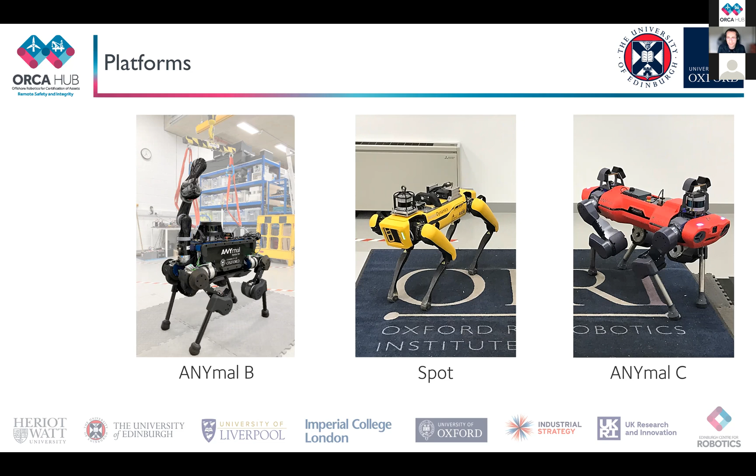So the challenge builds on our strengths, of course, from our previous ORCA Hub work. And the main focus now is further developing our inspection and manipulation capabilities.

I hope many of you have already seen some of the deployments and demonstrations that we've done over the past 3 years as part of the ORCA industry demos. But now what we're focusing on is these 4 main tasks for the challenge.

So one would be, of course, navigation and manipulation for real-world facilities, working more towards inspection and intervention capabilities, automated monitoring of the state of a system, doing all that with online perception feedback, which would be important for the leftmost task that we'll be working on with the ANYmal robots with the manipulators.

And then the second task would be on developing scanning capabilities to deal with complex curved surfaces and how to best integrate that with loco-manipulation capabilities with our platforms.

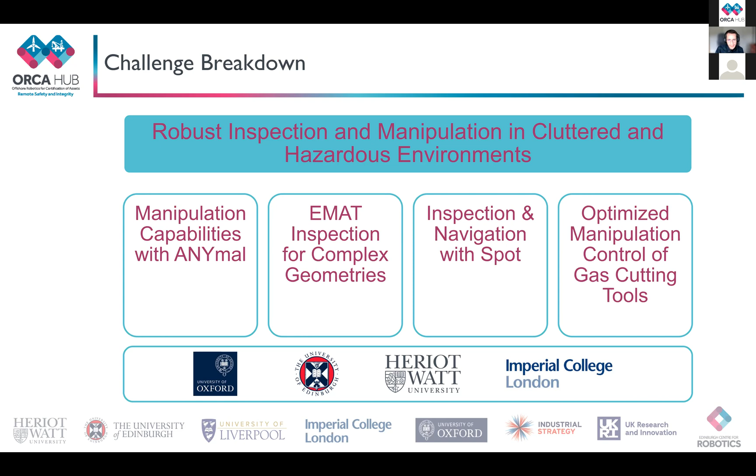And all these tasks are mainly supported by the ORCA partners listed there: the University of Oxford, Heriot-Watt, Imperial, and of course the University of Edinburgh. All of us already have a strong track record along the lines of the tasks we're proposing here, and we hope we can develop and extend this quite a bit over the course of the next year. So now I'm going to go in a bit more detail on each of the strands of the challenge.

I realize that I have way too many slides here, so I'm going to be quite brief on each slide. But I think it's quite important to have this information here so you can go back to it, or you can ask more questions and go into more detail into the particular aspects of the project that you're more interested in.

So first of all, on navigation and manipulation in cluttered environments, we've already been working on facility level multi-floor path planning. And now our focus would be on how we can add temporal semantic information and how to integrate that into a digital twin of a facility.

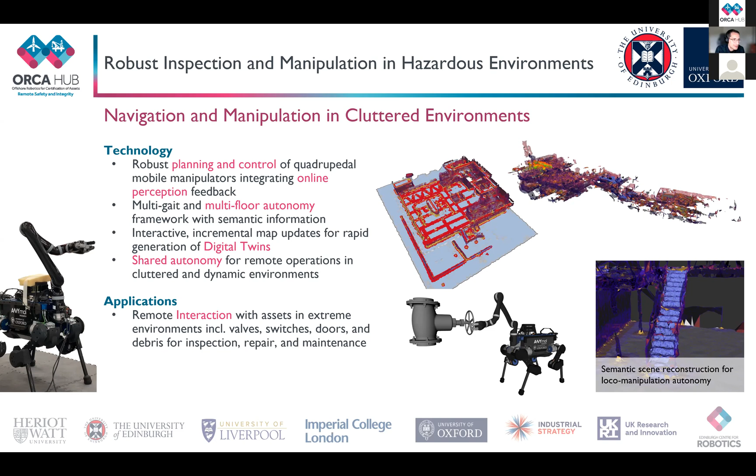And these are some examples of how the work will be shaped. So this is the approach that we have developed over the past 3 years on working with the ORCA Hub. This is a geometric-based approach that can either use point clouds that we collect on site with the robots, or we can use a model of the facility that we had beforehand.

And with this we've developed a geometric approach that builds a digital twin of the facility, and this can then be used, on one hand, as a way of doing really fast motion planning or route planning on multiple floors, and on the other hand as a way of storing other aspects of the facility as temporal information, semantic information, occupancy information, and any other type of detail that we want to be able to log.

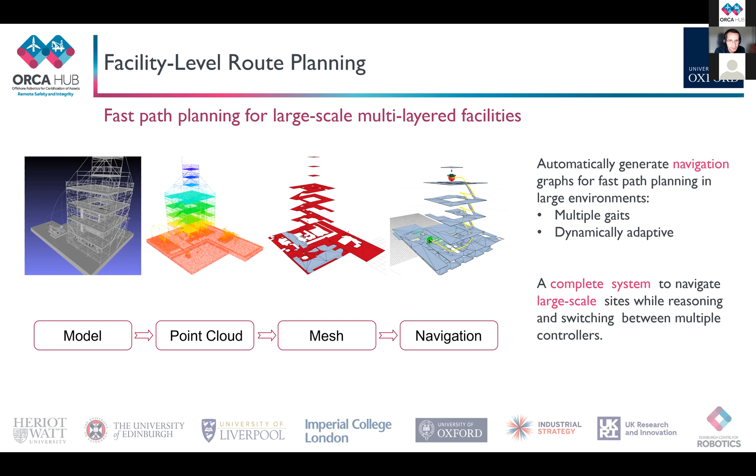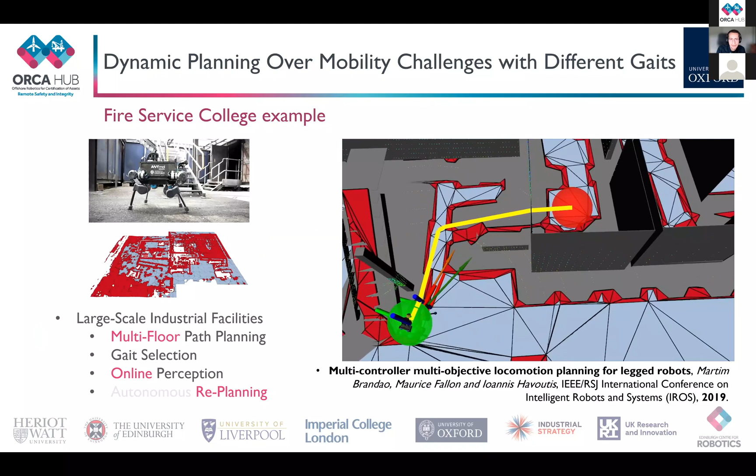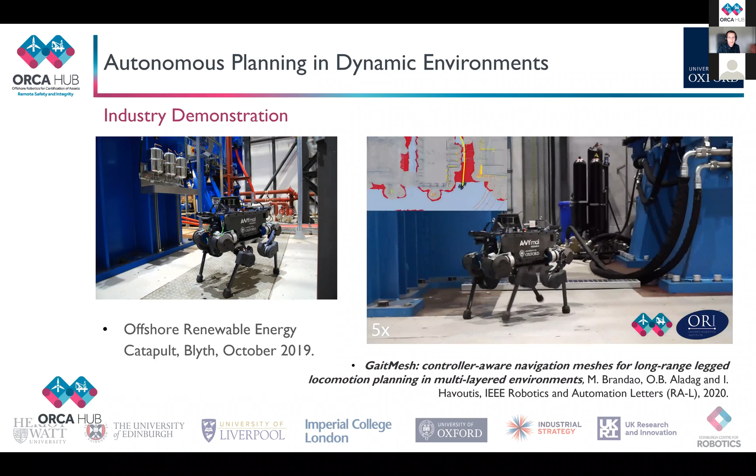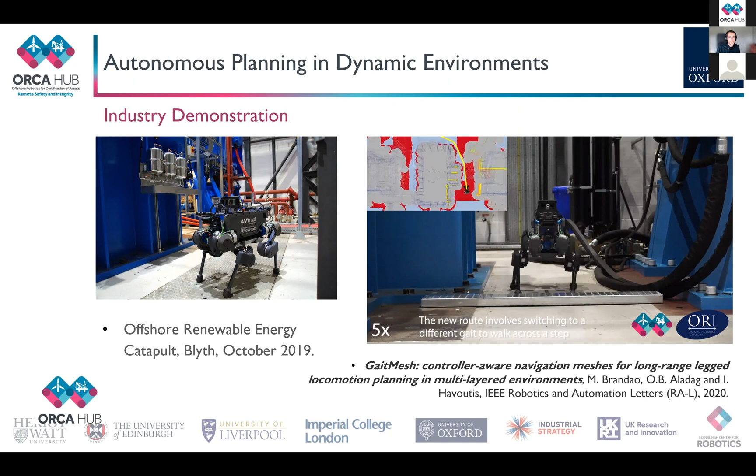So this is how this looks from the perspective of the robot, and this is what we use to do the path planning. But what I think is more interesting is that this is what enables us to react online to a changing environment. For example, having a robot that does inspection tasks completely autonomously, and then having different routes change, for example having obstacles or people in the way of the robot, and having the robot autonomously decide which path to choose or how to avoid moving obstacles and how to deal with humans and so on.

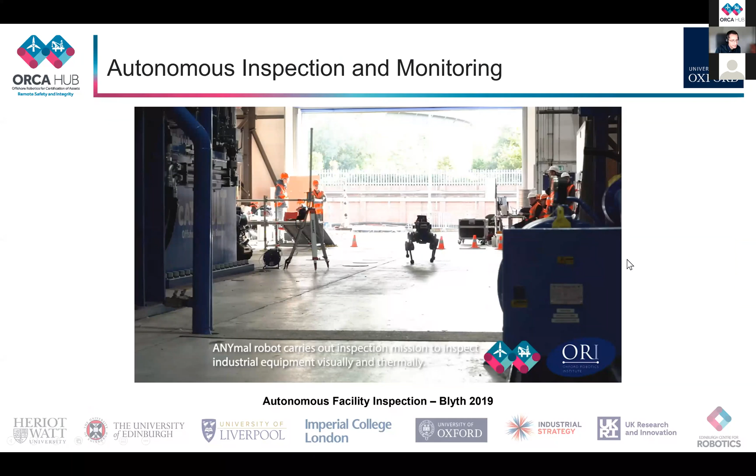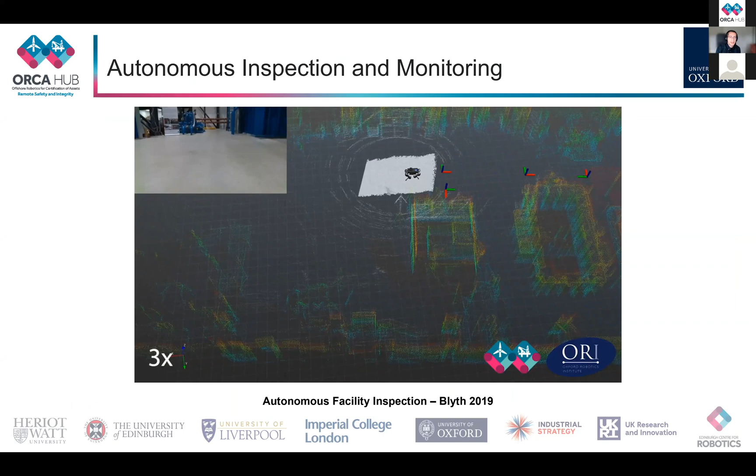And of course, this is only one part of the bigger picture. That is the capabilities that we've been developing for completely autonomous inspection of large industrial facilities. Here is one clip that some of you might have already seen. This is the framework that we developed for building a map and then having a robot perform this sort of

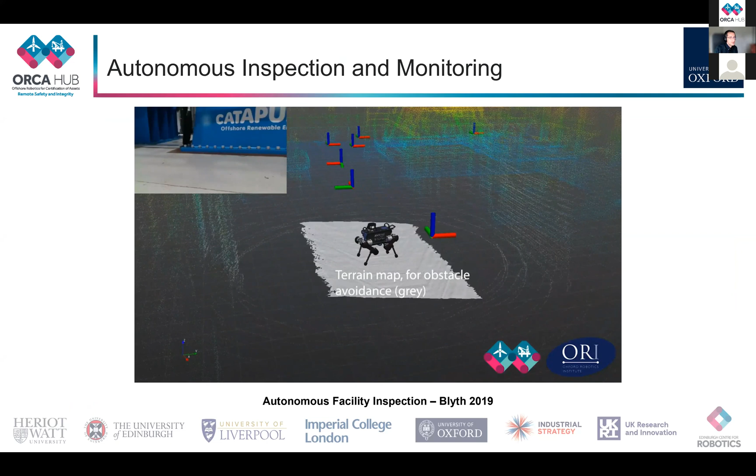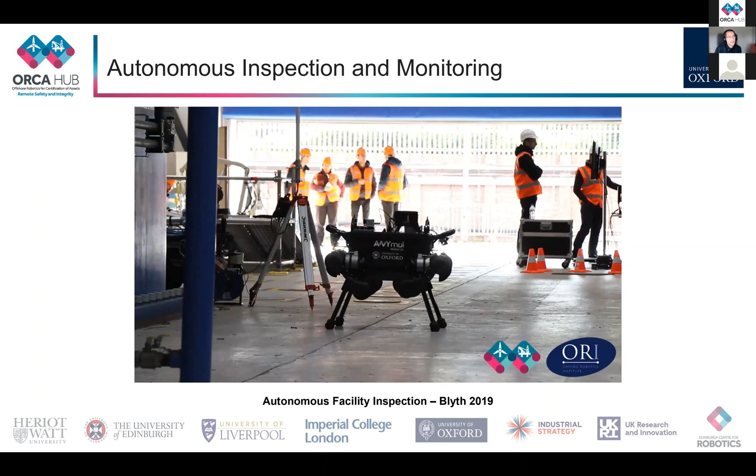inspection tasks in a completely automated fashion. So the robot here is following a route that is its regular inspection path, and then it's pointing its sensors to the points of interest that we

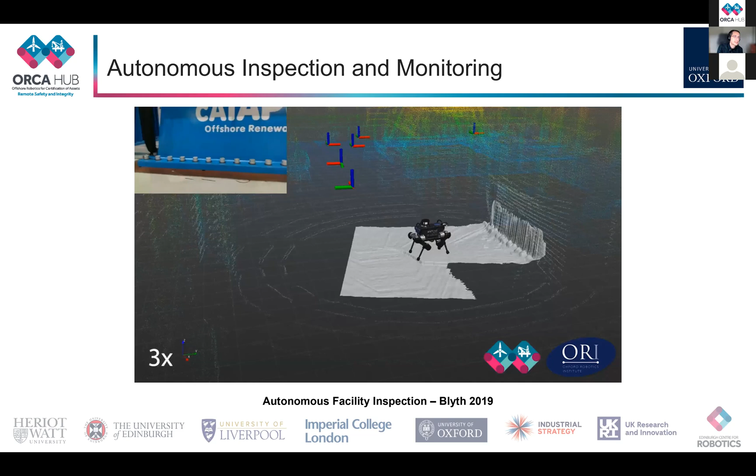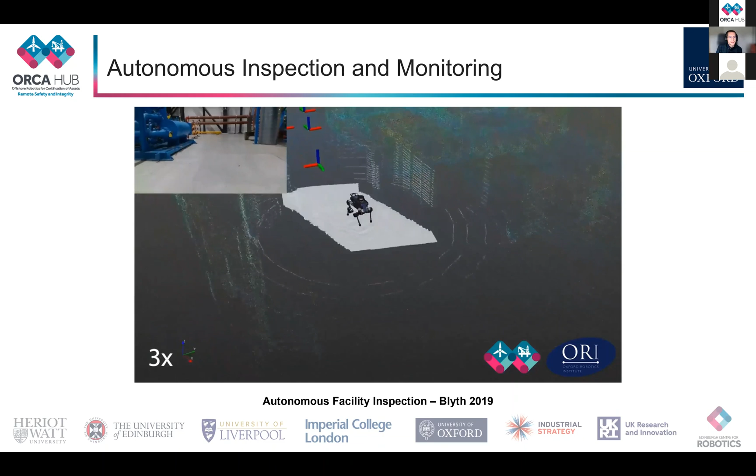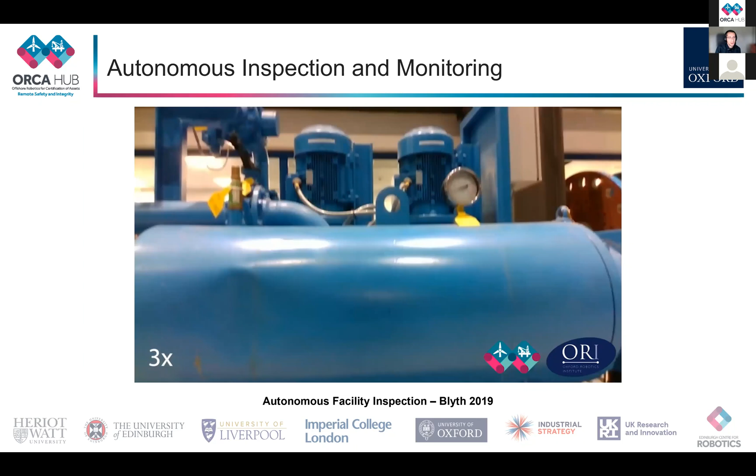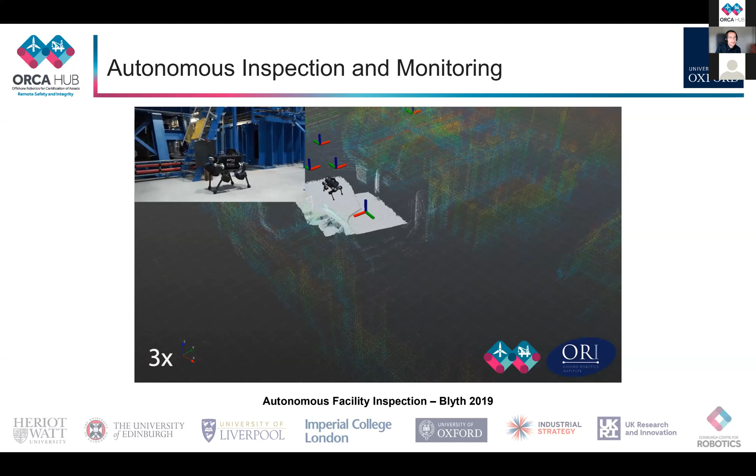have pinpointed on the map. And this is a task that can be performed autonomously and over a temporally extended period of time, so you can get very precise data from the facility, and you can have a clear picture of how these evolve over time, over long periods of deployment as well. So apart from dials, valve states and switch states and so on, now we will be integrating other information such as heat signatures, anomaly detection, corrosion detection, structural deformation, and so on.

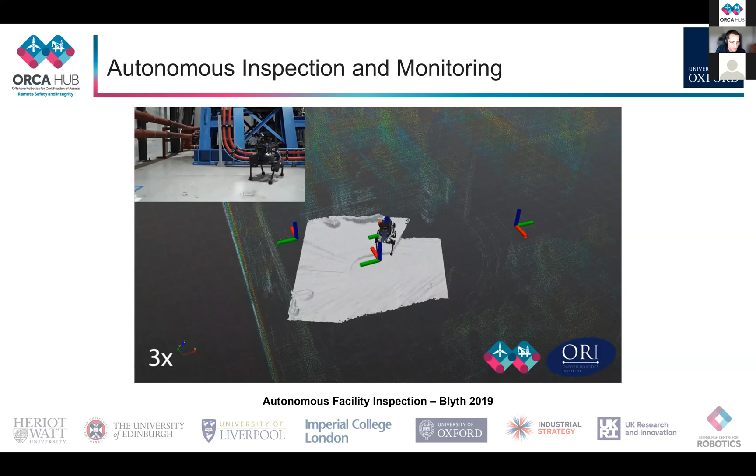And yeah, this is a bit more detail on what I briefly touched upon earlier. So this is how we can have a robot navigate a facility. Here the facility is our lab space and our office space in Oxford, and then understand in a sense what parts of the facility belong to which room, through a set of geometric and semantic processing boxes, if you want, then understand, for example, which parts of the facility are corridors, staircases, doorways, or

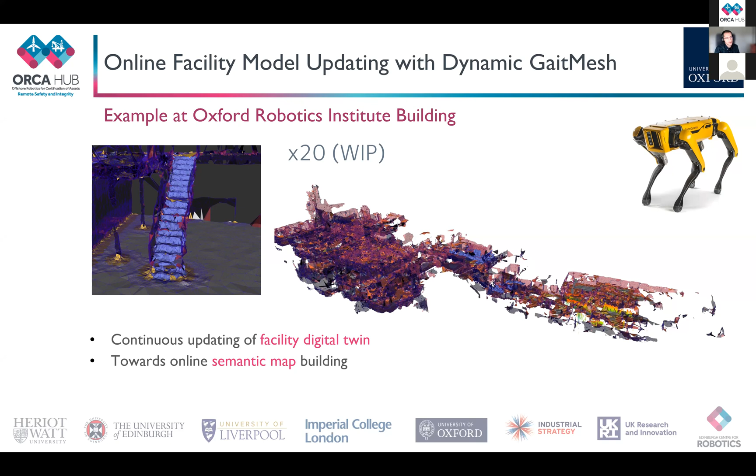more detailed temporal information, like this part of the facility, for example, during the day is generally slippery or wet, and this part of the facility, for example, at that point during the day is more crowded. So, for example, on building a path through the facility, this is to be avoided and so on. And of course, this is

part of the work that we're developing to support manipulation on these platforms. Here you can see an example, a work that the University of Edinburgh has developed. The main point of this work is how to work on real-world environments. Here's a lab demonstration and how to adjust, how the robot can autonomously adjust to a set of challenges that might or might not be observed by the robot.

These are very extreme cases that you see here, both in a physically realistic simulation and the real system examples. But this is kind of demonstrating the robustness that we require of the systems that need to perform these sort of tasks in a real-world environment.

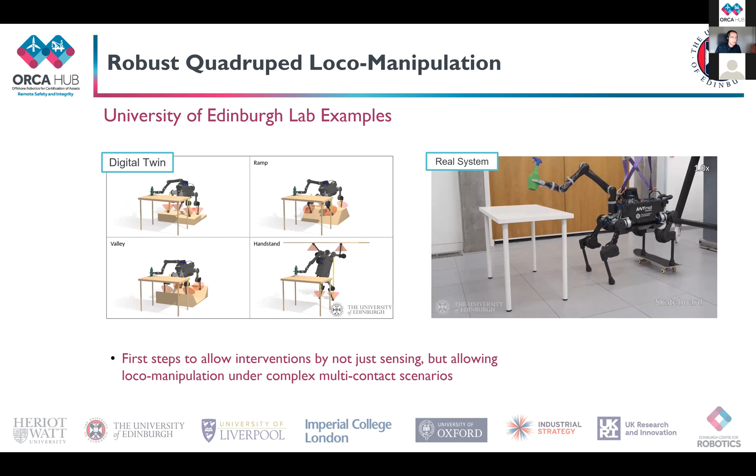And of course, this is another main point that we're bringing up here for the manipulation capabilities, that this would be using real online sensing to be able to perform these complex tasks. This would take the form of a number of demonstrators on facilities of partners and of course in lab.

And what we're aiming on having here as a result is automating many loco-manipulation tasks that are either performed autonomously by the robot, but they can also support shared control with a teleoperator, for example, that might be commanding the robot remotely, or completely autonomous operations in an energy facility where the robot needs, for example, to turn valves, switch, toggle switches, open doors.

So this can be part of the regular route of the robot, or if the operator is commanding the robot to reach a particular point, then there is an interface that is very intuitive to work with, where you can command the robot to perform particular tasks that are done autonomously.

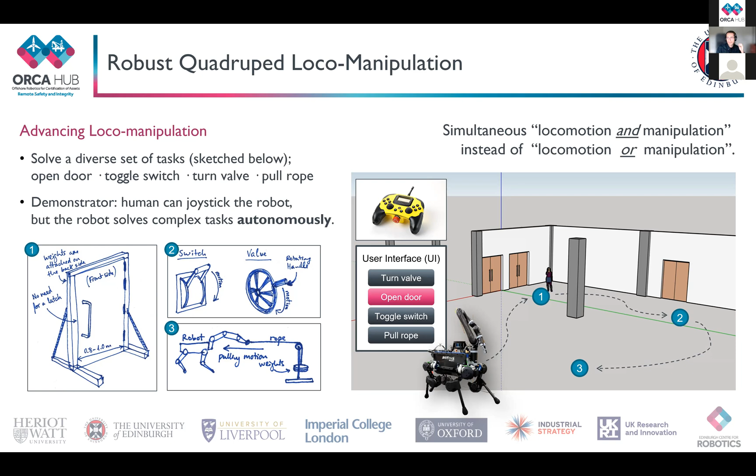So, of course, much of this work is underpinned by our mapping and map building framework. Let me see why this video is not already playing. All right, here we go.

So this is what allows us to build very accurate models of facilities. Here is building a model of a college here in Oxford. So a set of buildings, a number of passageways, large areas. So a combination of many different areas and areas with different characteristics.

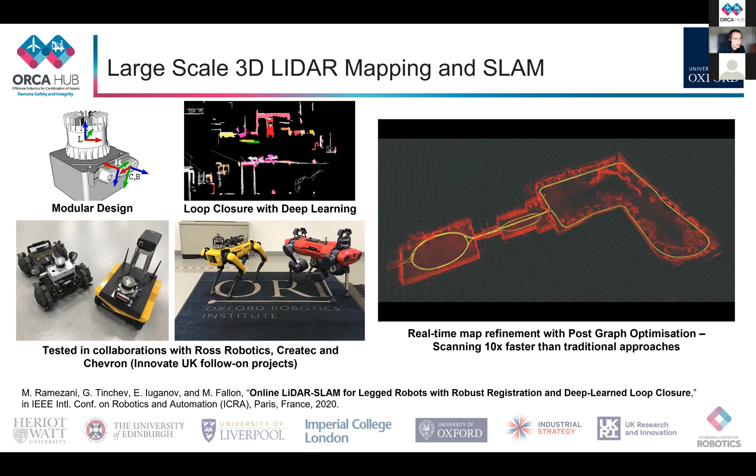And of course, this can be deployed in various platforms apart from the legged robots that are shown here, also on wheeled vehicles that we have experimented with. And much of this pipeline is supported by sensor payloads that we have built in-house and have been using successfully over the past years for very accurate mapping and localization.

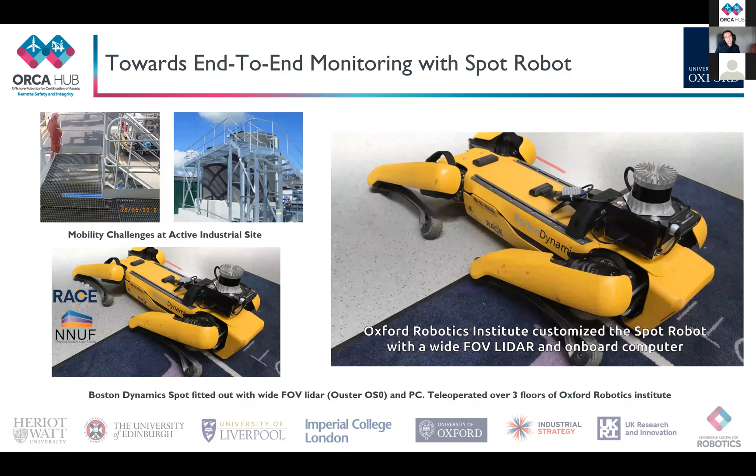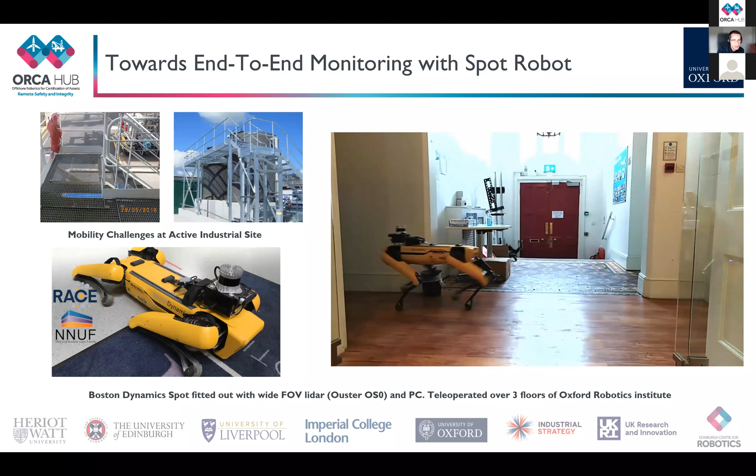So this is more recent work on that front. This is integrating our sensor payloads on a spot robot and having the spot robot navigate our office space and our lab space, and building a very accurate digital twin of our building. And you can see a number of capabilities that we have here.

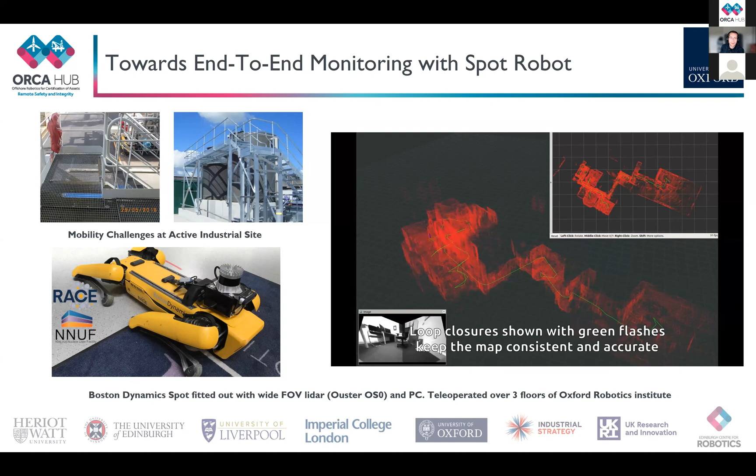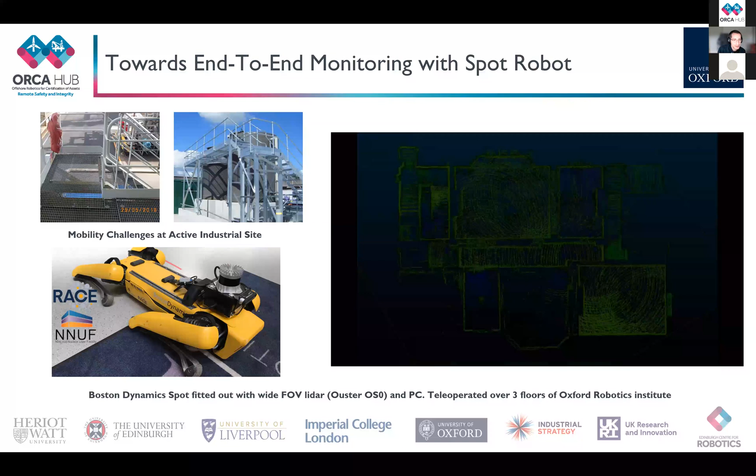Of course, the mobility of the platform is very important here. So many tight corridors, narrow passages, going through doors and so on, and building a very high fidelity model of the environment, at which there are multiple floors that we're showing here, and where we can very accurately localize and then build on top the information that we want the digital twin to contain.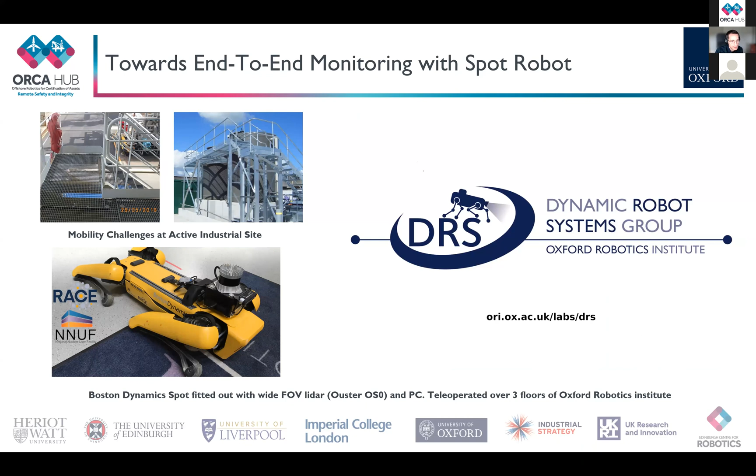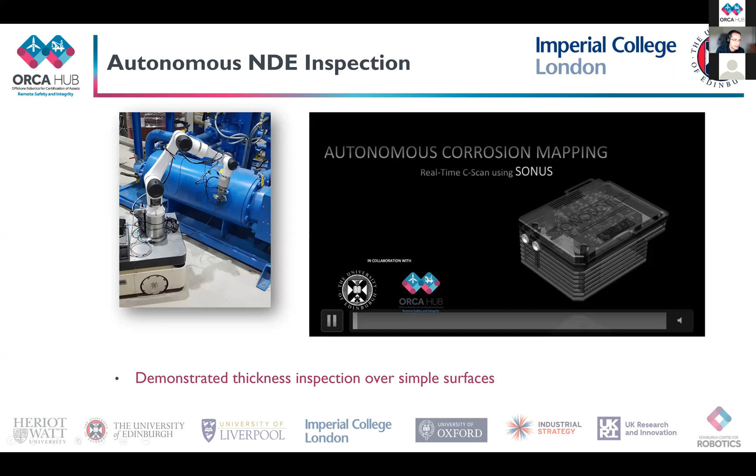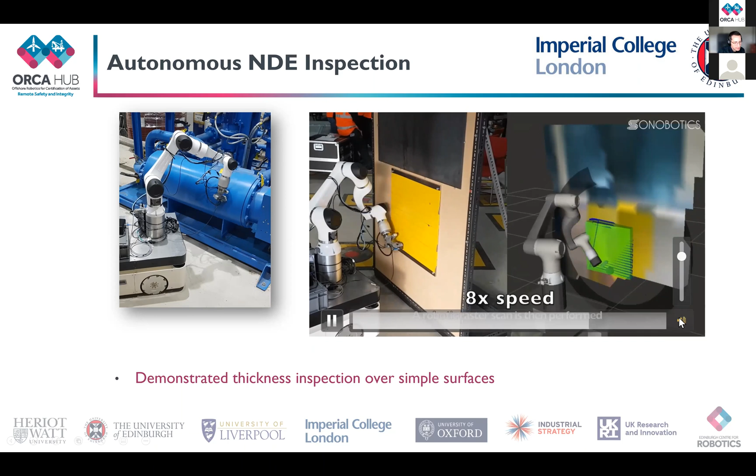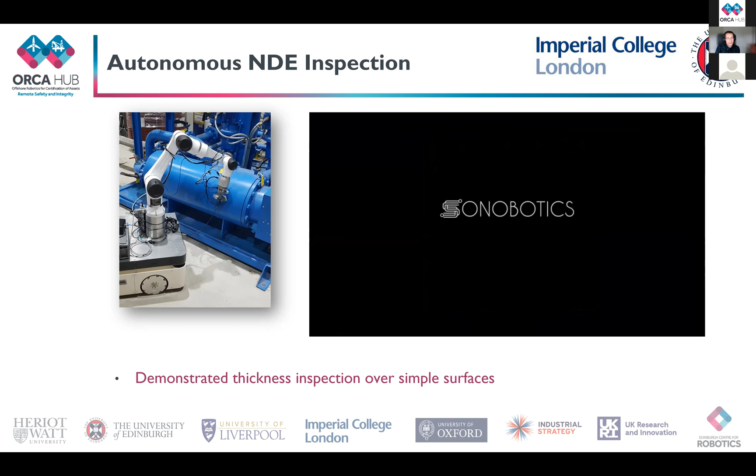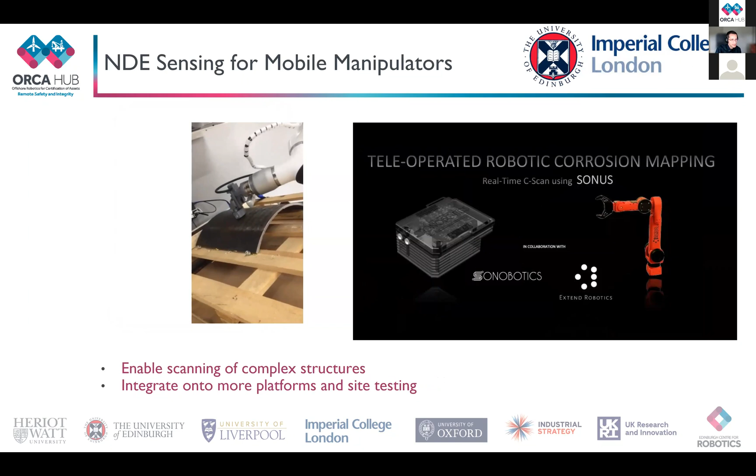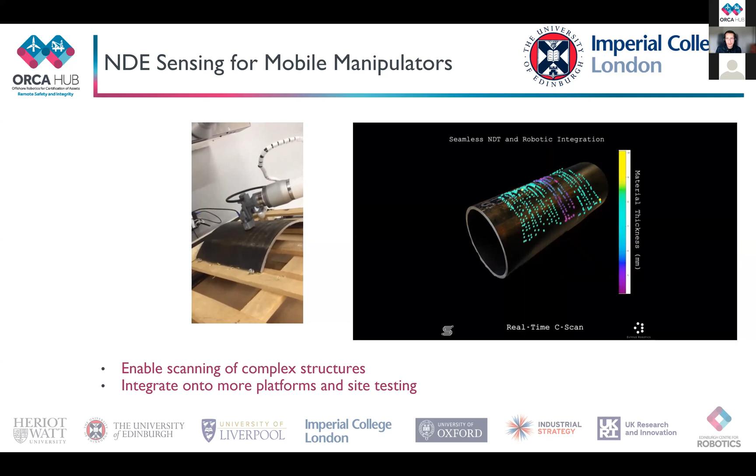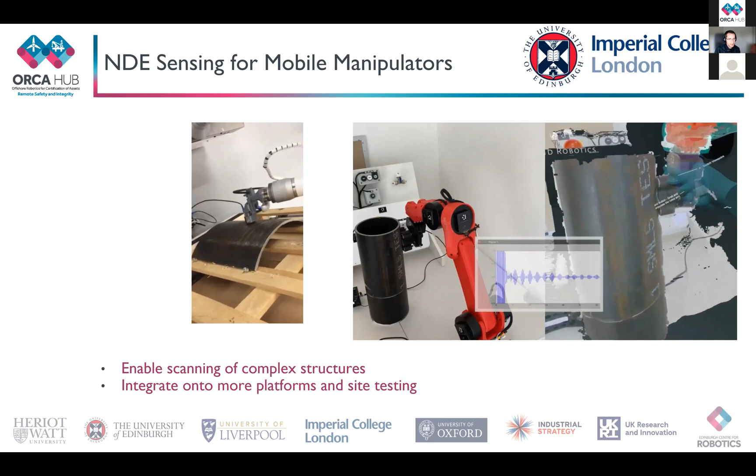This is a capability that we already demonstrated, and what we want to extend that to in our current work is, of course, more complex structure, so curved components, and we are looking into integrating this with Loco-Manipulation capabilities with our Quadruped, so we are more flexible on the surfaces that we can approach and we can evaluate. So integrate onto more platforms and then extend capabilities to more complex surfaces and more complex geometries, for example, examining weld points and where pipes meet pressure vessels and so on. More interesting tasks and more challenging structures.

And last but not least, the new area that we will be exploring, the smart tool wielding for decommissioning and waste recycling. This is of course leveraging the autonomous manipulation capabilities that we are building with the other platforms. This will initially have the form of a gas cutting mockup in a controlled setting in the lab, because we are not that familiar with the machinery yet.

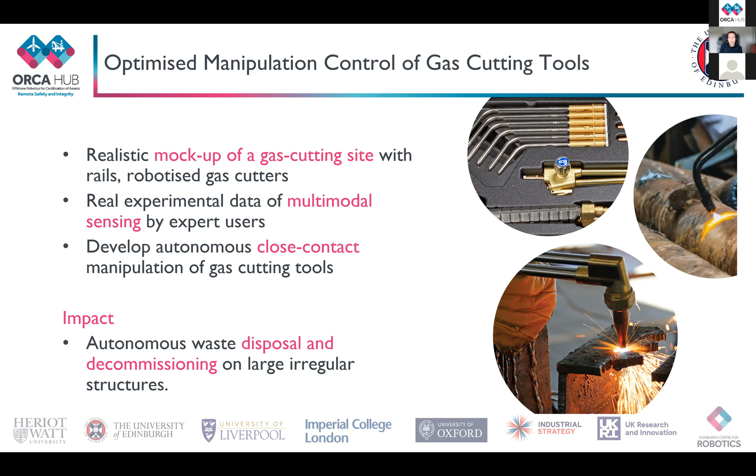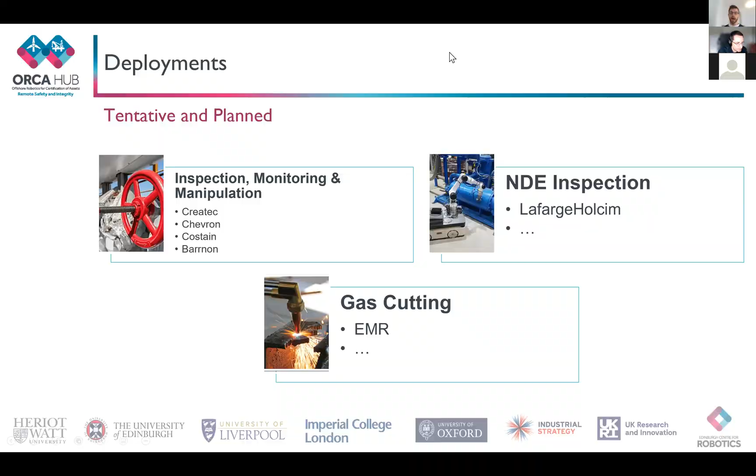So we had one question regarding the explosion proofness of the robots. Is it in scope to look at the certification and hazardous use of the robots?

So the quadrupeds are not, for example, ATEX specified, and this would be a long process to achieve that. On the research side, this is something that we will be happy to support, but not something that we will do ourselves. So the manufacturers of the robot are most likely the ones that would go for the ATEX specification, and we'd be happy to support that. We already have some ideas about how we can do that. So we have been looking into, for example, gas sensors that can be integrated on the robots so their gas exposure is safe. So when gas is detected, the robot shuts off, and this is one of the ways to mitigate explosion risk.

Okay, thank you. So I don't see any other questions in the chat, but I've got one which I'll just ask, which you did briefly cover in the last slide there. So given that we're an industry-driven program, what are the key things that you'd be looking for support from industry for your scope of work?